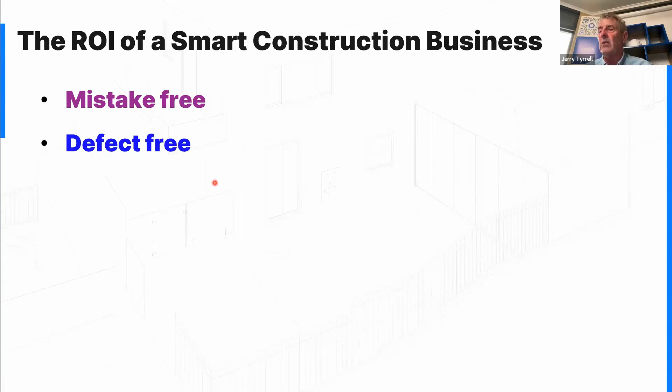I can't comment too much on global construction, but certainly in Australia there is a little bit of a drive for speed. We're under the pump in terms of the amount of construction projects we need to get out the door, and so this idea of speed at the cost of quality and compliance is out there. Are you essentially saying that if we've got some of those basic ideas of quality culture, access to compliance, clear knowledge, we can achieve speed and quality?

Yeah, it's a false economy, this story of speed, because I'm shameless about my ability to get jobs done. It made no difference to me to dust that corner, to make sure I'd sanded a surface, that I'd checked a surface prior to final coat. You'll see that the painting tool came out today as one of the granular trade things, which is really quite special for me. All aspects of that little bit of time checking a surface prior to top coat just made so much difference to the sparkle of what we come up with.

I haven't had a good look at the Paint O'Meter, Jerry. Do you want to talk about this? Oh, look, you're kind to me. Look, most of you know that I'm an architect designer, and I've done lots of other things as well.

So I'm a licensed contractor, but I'm not arrogant about this. I'm a really good painter, I loved it. People told me stuff. I read the back of the cans and the back of the packages, and so I'd know most things. But if you go back to some of these things, these best practice...

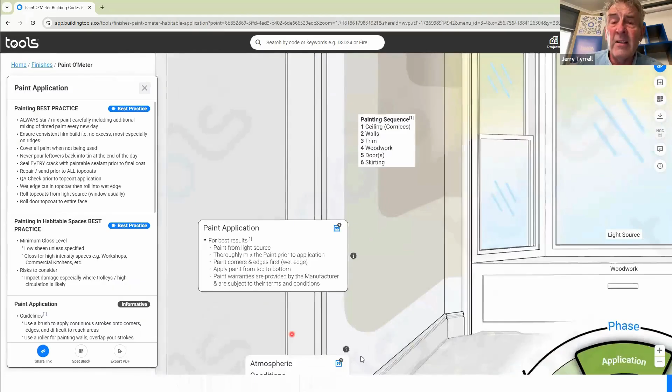So just stay on the side panel. Don't like side panels, but this is a good one. Always mix your paint. Sometimes people don't stir and mix paint, so the chemical composition, the science - and put up with me, this is smart, so commonsensical. I don't want to lecture you peeps out there, but there's nothing wrong with being really careful and thinking like a craftsman, knowing that the science of your paint has been very well developed by Dulux and some of the great chemical companies out there. But if you don't mix the chemicals together correctly, and if you don't mix the tint together, the paint is not going to perform as you want.

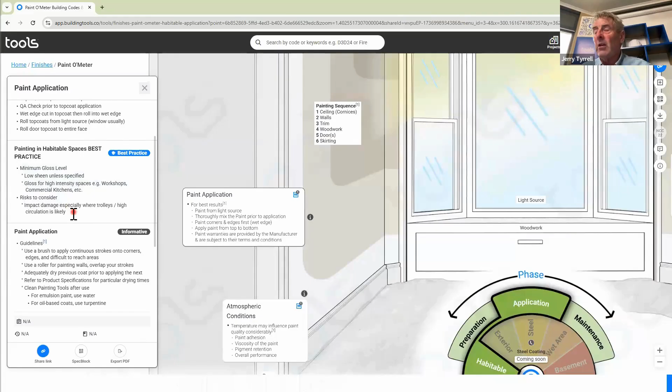Then there are other trade tips there on there. So obviously the prep - to me, you'll see we put on our Paint O'Meter. This is the first time I've ever seen this in any of the manuals. We've put in, if you go to the top of the screen there, see how we put the light source there? One of the major advantages for anybody putting finishes on is to be looking into the light as you apply it. So you're really careful - you're not only using best practice technique, which is either brush, roller, spray, but you're also looking very closely to make sure any defects in your application technique come in.

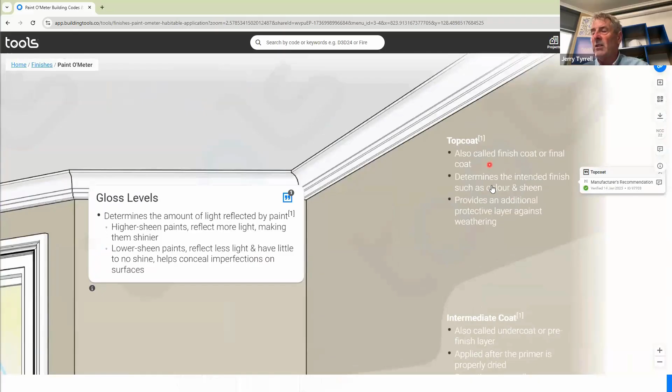You'll see we've got gloss levels, we've got all those things that even if you're an architect designer who's never used a paintbrush, never used a roller, you at least know exactly what all the craftsmen and tradesmen know about all the different gloss levels, the different textures. I know you're passionate about mold or the lack of it, so we've got to be aware of this. You've got to be aware of the dampness in your space, the dampness in your material. You've got to understand what moisture meters mean. These are smart - this is all this accumulated smartness that allows us to be mistake-free, defect-free.

And a lot of this, when we're talking about culture, quality culture, right - a lot of this is passed on through generations of painters, this knowledge, but just essentially having this readily available for people to browse through, read, and also disseminate, to share to others.

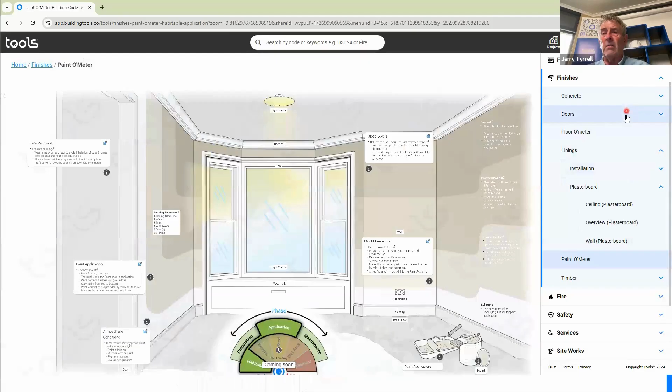I think that this is the craftsman - these are dozens of craftsmen. I had Danish craftsmen teach me how to apply gloss. This is when they were an oil-based gloss, and just how his brushwork was exquisite, and he cross-hatched. So most of you out there, hopefully you've done a bit of painting, but if you haven't, you've got all the technical aspects here that make you much more knowledgeable.

We will have exterior soon. We'll have other things being added to the Paint O'Meter that allows you to look at it and be up to speed, and be able to give good advice to both your client, and also to chat in the same language with any tradesman or craftsman doing the work.

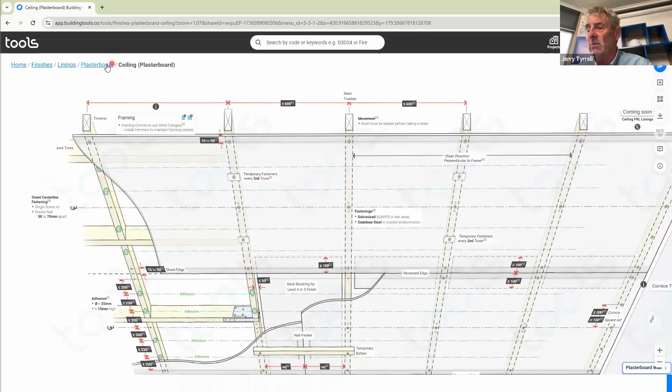Excellent. If I just take a moment here and go through some tools basics. The tools, the graphical representation of the building codes. You can find, zoom, share.

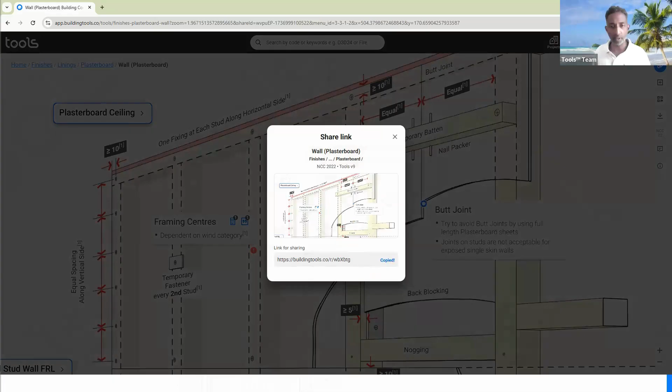One of the things we're really looking to do is be able to share this knowledge. So you can zoom into a detail, generate a share link. I always encourage people using this to zoom into the detail, and you can share that. Andrea, you're on the call here - I can share that with you, and then the recipient can get access to that knowledge.

Some of the other things we've added to this, Jerry, are code citations. Let me find one with code citations. The good part about this is that there was an emphasis in the early days of people saying, well, where's this coming from? And we'd say, well, obviously this is all taken from the NCC and all the reference documents, and we didn't have the citations in. So we've entered the citations.

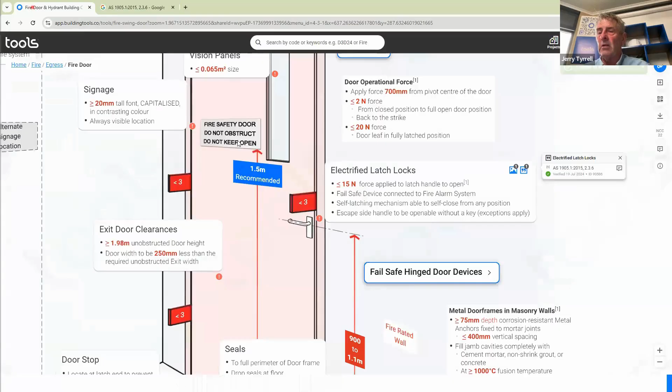I've had nobody say to me that they are going back to the citations unless they're into some sort of conflict or court matter, where they can very simply show the tribunal, show the arbitrator, show the court, show a barrister this drawing, and they can click the citation and go back to the relevant clause in the NCC and/or the reference document.

Absolutely. So do check it out. If you haven't checked it out, you can go into this menu. You can even go to view all tools, and there's 296. We haven't quite hit 300 there, but there is a plethora of information.

So coming back to this - mistake-free, defect-free, conflict-free. There are so many issues on site, Jerry, just because of differing views of perhaps the same detail. Yeah, people's misinterpretation or different interpretation of the codes.

So I'll quickly flick up a detail that's on tools, and I can clarify a fire door gap or something that they're arguing about, or a gradient or a ramp slope.

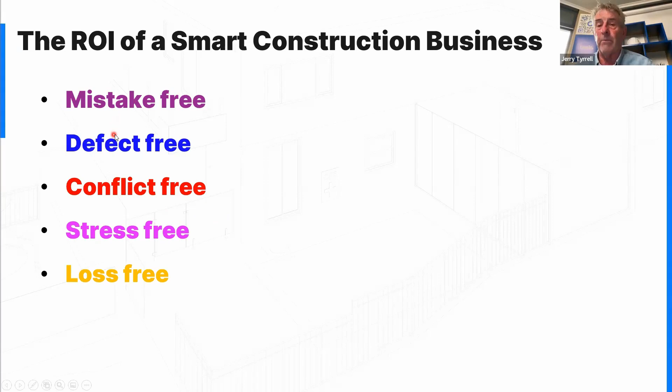So really, we look at these, and these are lovely ideas: to be mistake-free, to be defect-free, to have low or no conflict, reduce stress - we all love that - ultimately reduce loss, not only in our own practice. From all of those four above, you've got - yep.

And remember, stress creates an emotional, societal loss. So that's why I'm not into making a mistake and then having the stress of it, going home and not making profit, coming to work and having some bully stress you because they're just bad people. These are all losses that we're carrying, financial or societal or emotional.

Well, let's talk about that. So it's nice to talk about this. Let's say I'm in a particular situation where I want to use knowledge from tools to actually create that. What should we go to?

Let's go to ramps and walkways, for example. That's a different one - that's external. So it's got the maintenance walkways as well. Yep, so let's talk - let's say we're dealing with a particular detail.

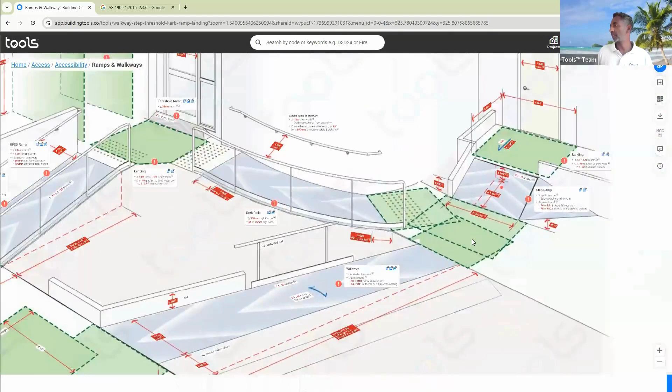All right, so I can zoom in. What are some ways that this is going to reduce conflict, stress, defects, mistakes - versus a concreter that's not going to put that at the landing, won't put a crossfall in it, so it's essentially a flat landing.

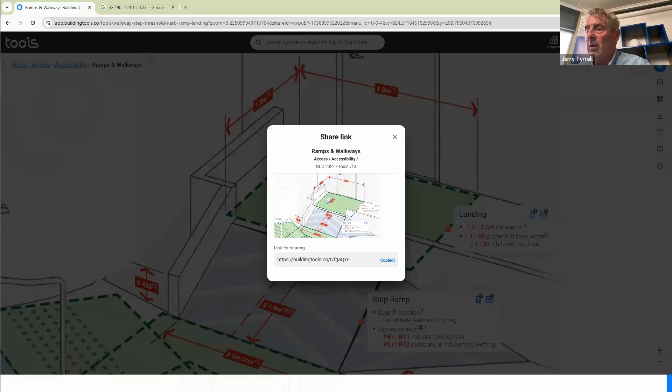And I've dealt with concreters now for 5 decades. I find they are particularly respectful. When I was younger, I was bright-eyed and bushy-tailed, and they'd put up with me - I'd say, let's make sure there's no ponding. Now I just hold up tools and say, look, we've got a slope in everything. You'll see that one of the things we launched today is our drainage science, so everything's got a slope in it.

The 1428 standard, which is where most of these ramp geometries come from, although it is mandated in the NCC, it does call up the access standard.

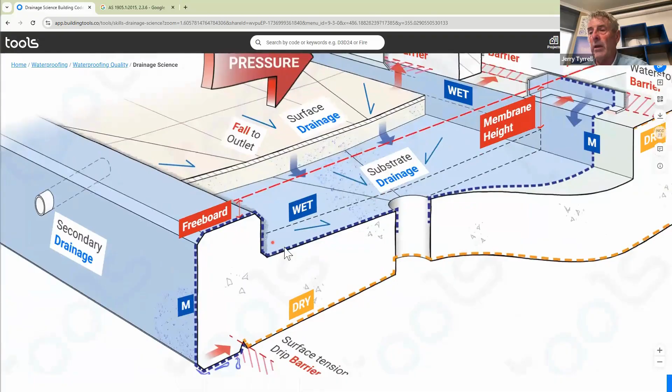We illustrated all the concepts of Newton's science. Isaac Newton, in 1687, decided he would articulate Newton's law, which is basic gravity. So we put all the ingredients of drainage science into one drawing called our drainage science.

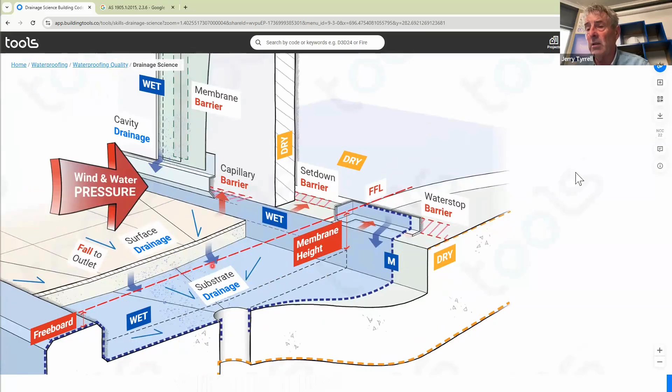It's a wonderful way for people to remind themselves, if they're having a quiet time, or if they've got subordinates who aren't careful about getting slopes and overlaps right, to create completely dry buildings. Believe it or not, dryness isn't just about the embarrassment of water getting in. Any moisture that gets into your building uncontrolled can lead to mold creation, which, if you've got a son or daughter with asthma or someone who gets allergies, is just disgusting.

This idea of integration of trades, understanding how the trade or craft of one person affects people down the line, and this includes design, right? It starts at the design stage. I had this despair moment about three weeks ago, thinking people aren't curious, and this teacher said to me, everybody's implicitly curious.

There's nothing wrong with believing that, yes, you have to blend a few things together. Don't make mistakes. Understand that when you're going to build, avoid defects and conflict on site by making sure you don't make mistakes, and get on with people who might know more than you do, and also teach and share with those who don't know as much as they should.

I think that's one of the keys here, is that in order to achieve all this, firstly, let's get clear about what craft and quality means. So quality meaning including the building code standards, but also the extras that make something high quality.

Being very clear about that, but then also being able to share, specify, and mandate that to the people you rely on. So if you're a designer, in the design cohort, Andre, I don't know exactly what you do. Maybe drop us a message and tell us what aspect of construction you're in.

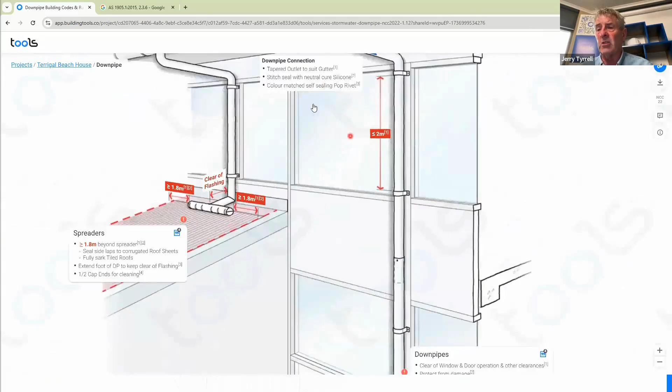But it's really nice to think that the certifiers will have less to do because they're passing on this knowledge, they're helping teach. So when they flag a defect or say it's not to code, they're able to quickly share a proper spreader design or just give tips.

And often the certifiers themselves don't even know what the correct plumbing process is. There are more and more carpenters coming into the certified building surveyors industry, but a lot of certifiers are academically trained and may not have had the trade skills. So it's nice to have an illustration of exactly how a tradesperson would do it.

Andre, thanks for mentioning working client side as a project manager. I think as a project manager, that's one of the ultimate octopus kind of roles, because you've got multiple stakeholders, multiple egos, multiple personalities to deal with, and multiple interpretations of what quality is.

A designer might think it's one thing, the engineer might think it's something else, and then the builder and the tradesman have a different interpretation again, and you're in the middle trying to coordinate that. Not an easy role, Jerry.

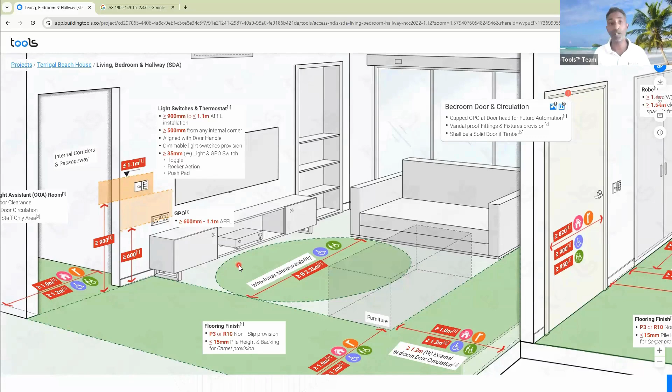And it's all affecting productivity because those four cohorts are all looking at things their own way. Whereas I think the basis of most trades, the source of truth, remains the same. Materials change, geometry changes, colours change, finishes change, but the basic geometry that you have to manage, Andre, stays the same.

Absolutely. So, Andre, one of the things you can do as a PM is create folders within the project section.

You can bundle different tools together, then download those as PDF, or you can share those. You can share a link to that, and then the people that you rely upon to get it right, to deliver ultimately the product that you need, and also deliver it in a mistake, defect, conflict, low stress way. You can. It's okay to get it right.

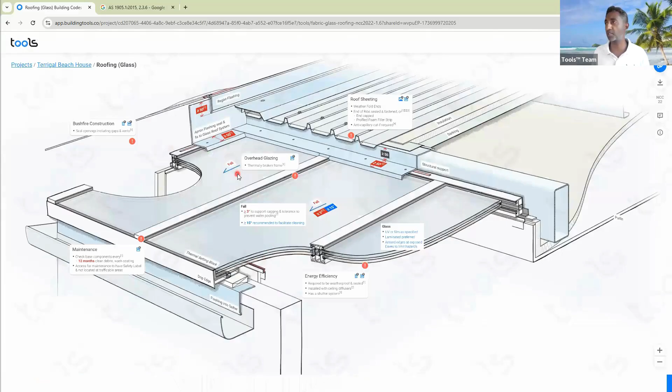100%. And you mentioned before, a teacher mentioned that people are inherently curious if they're engaged, if knowledge is interesting and engaging. I think in today's world where attention spans are shorter than ever, being able to rapidly communicate construction compliance in a fun, engaging way, graphically, is definitely one way you can really create that teamwork.

So one of the points I put in here was communicate to team and customers. This is getting back to the culture, Jerry, is that you communicate internally and say, look, we're making a stand for quality. We're making a product like tools and other materials available to all of you, and watch their curiosity. One of the great things about tools is you can get data on what tools are most popular. It's amazing looking at the journey that people take when they start exploring tools, and the inherent curiosity being able to...

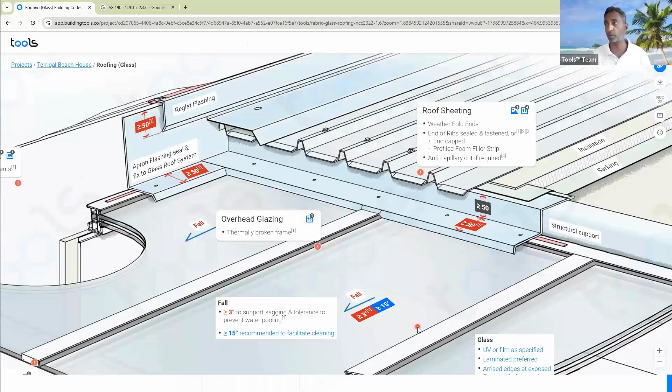Look at BlueScope's response, Siva. Remember them looking at the valley detail with us? Yep, and just their curiosity for that. Yeah, 100%. BlueScope Steel are very, very interested in communicating their quality standards graphically.

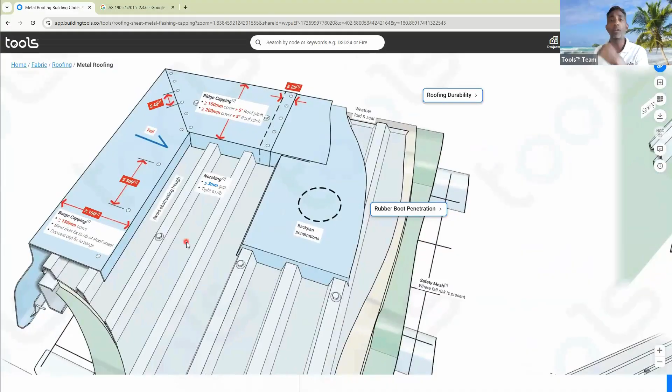It's all about knowledge and the communication of knowledge, right? So if it's easy and it's no longer in the too hard basket, we can get some of that. And also in terms of customers, as a customer, I want to rely upon you, Mr. and Mrs. Professional, to get it right. I don't want headaches, right?

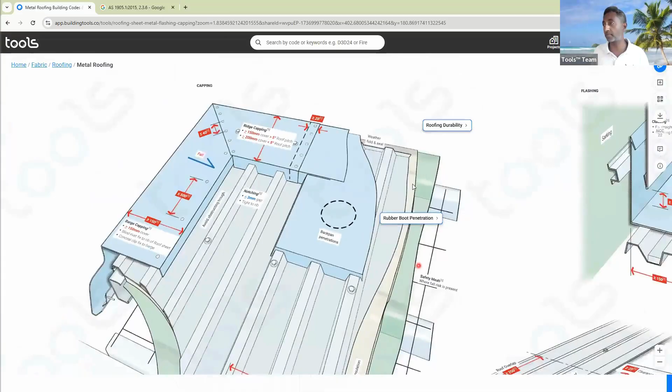And so if you're pitching for my work and I'm getting 3 quotes, if I see an organization that's using a quality system like tools, you're going to win more business. You're going to impress me. You're going to stand out. So these graphics, even if you're a layperson, everybody knows what they're looking at, you can look at that and go, okay, well, that looks like a roof, a metal roof to me.

Even the QMSs that I'm seeing, I remember I've watched 5 decades of people promising, yes, they're going to do this, they're going to do that. Nobody showed me how they were going to do it. So there was good intentions. I can say the industry was noble, but there was all hat, no cattle.

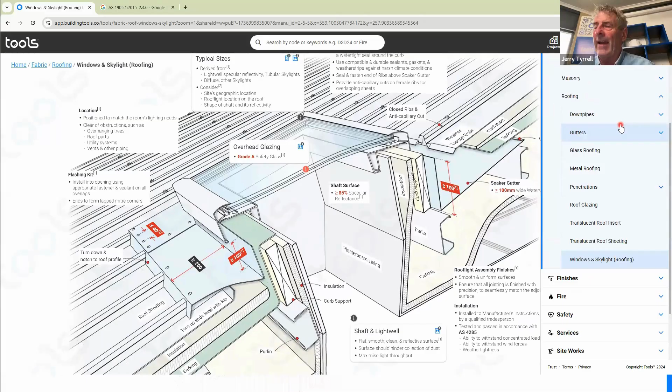Yeah. So they're saying, here, we've got the QMS, we're doing this, we're doing that, blah, blah, blah, blah. Well, tools provides the how to the QMS. And it's a relentless, reliable, provable, findable resource that everybody can turn to before they've made the mistake and made a dumb choice.

Just a couple of little things, Andre. If you weren't aware, you can generate a spec block, a specification block, which creates a QR code, and that's locked in time. So I've specified this for NCC 22. That can then be put onto a document, it can be put onto a drawing, and even if it's accessed 2-3 years from now, it'll go back to this version.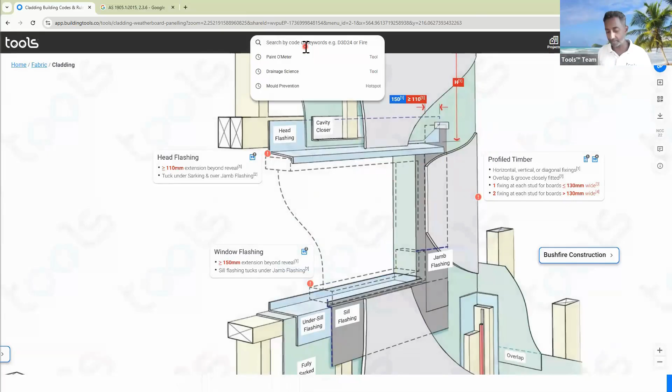One of the things the team is busily working on at the moment is prepping for the NCC 2025 changes, as of May 1st, 25. So what you'll get is the NCC switcher, and soon we'll have NCC 2025. You'll simply be able to change the switcher, and all of the codes will magically update to the latest codes. And I say often, it's nothing magic, there's a lot of work that goes behind enabling that. But our mantra is let's make education and knowledge easy to access.

All right, Jerry? Sure. So, okay, so that's the ROI. It comes down to communication. Andre, this is so good. With all focus on technology, I wonder why people in the industry are not focusing more on a solution such as tools.

Thank you, very kind. So much more value than anything.

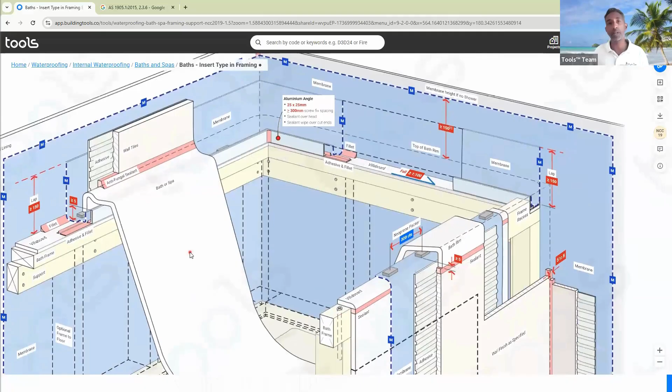Andre, this is, yes, a fantastic innovation, but in its essence what it's doing is solving communication. That's all it is. More than 80% of the problems in this world could be resolved with good communication. And what this does is graphically communicate the requirements, nice and easy. Doesn't matter if you speak a different language, if English is your second language, whether you're a visual person or a text person, you can sit alongside somebody and explain that a lot easier.

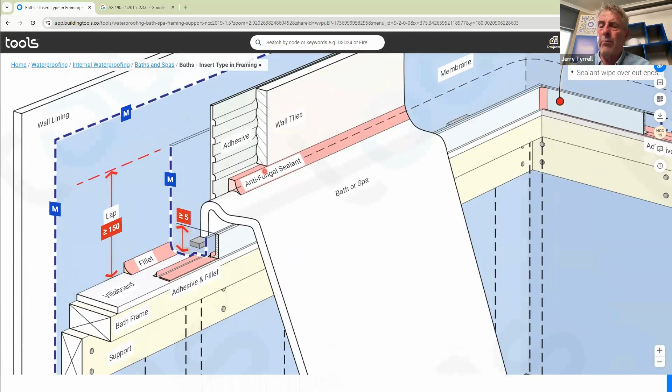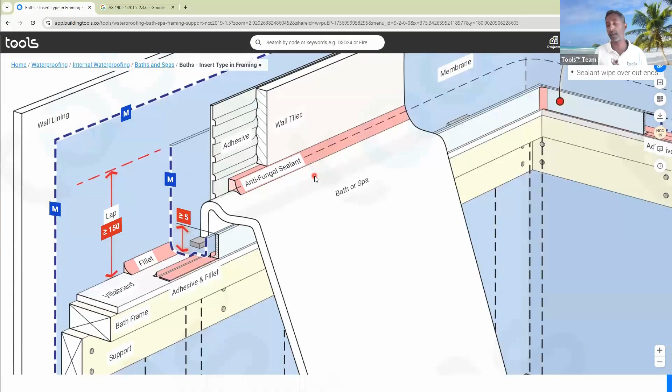We had Saudi Arabia approach us, and I said imagine if Gaza and Syria and Sudan were being rebuilt using Arabic tools. It's that easy to make those changes. Well, fortunately there's a ceasefire going on there, but there's a lot of work to do to rebuild those. So imagine being able to widely distribute a product like this, which clearly communicates building standards. We've got 2 million Palestinians who are feeling helpless and frustrated, and all they need are the right tools to get going. So don't get me started - that would be a very smart decision societally and globally for us to get behind everybody having access to tools in their language. So we're talking about smart.

So we'll finish off with this. One of the things we're going to be doing in the next sessions is deep diving into the tools. So Jerry, next tool shed we're going to talk about cladding basics, we're going to deep dive into ramps and walkways. This is the calendar for the rest of this quarter.

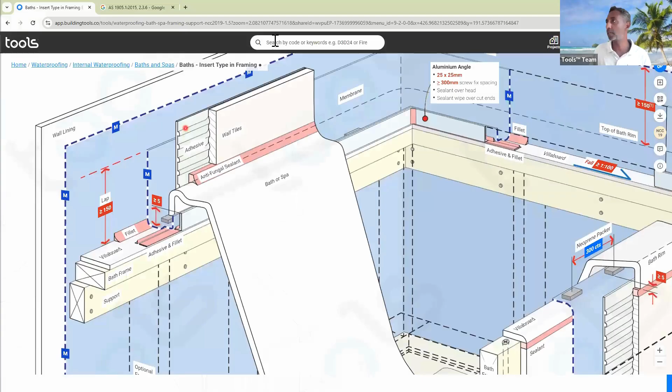Swing door clearances - our analytics show that swing door clearance is one of the most popular tools, which is amazing because I hadn't expected it, but this is one of our most popular tools. You come in and set your door type, so you say I've got a hinge side door and it's a meter wide, you can set using the whole meters and it'll give you the clearances. All of that dynamically changes, and it doesn't matter which path you're traveling, that'll update. So popular tool, we'll go into that a bit more and we're going to really cover, Jerry, the science of what's the why behind this.

Some of it might be obvious, there'll be a bit of that, but sometimes it'll just be raising awareness - sorry, I just had a feed from an investment client wanting me to look at a large hotel somewhere. So it will be looking at the science, but looking at some of these tools this first quarter allows you to see possibly why we've done this.

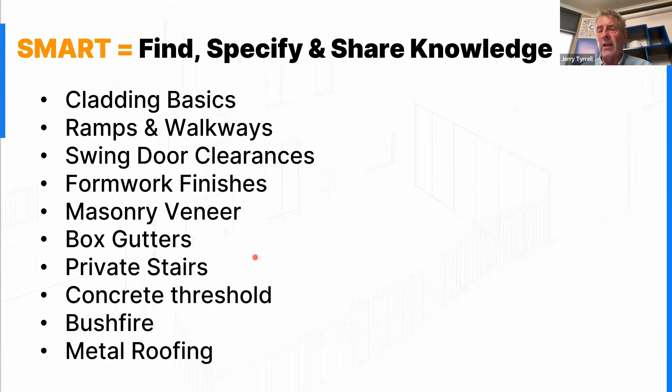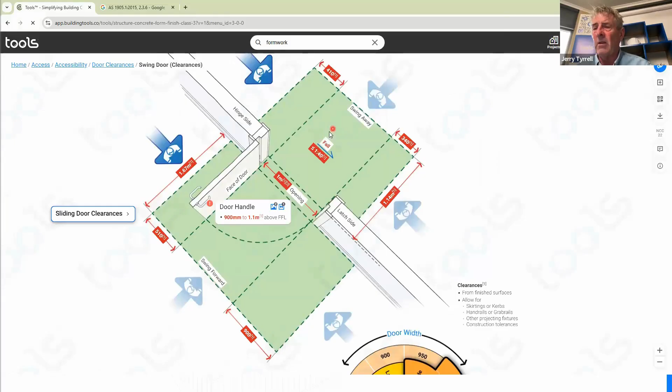So, formwork finishes - I'm not often looking at class 1 formwork, but I've often left it to the engineer, left it to the concreter. I want to be able to go there before they make a mistake on the entry of a $15 million building, or it might be just one beautiful class 1 finish in a residential home, a letterbox with a recess. I want to make sure we pointed out to them that you'll be measured by this level of quality.

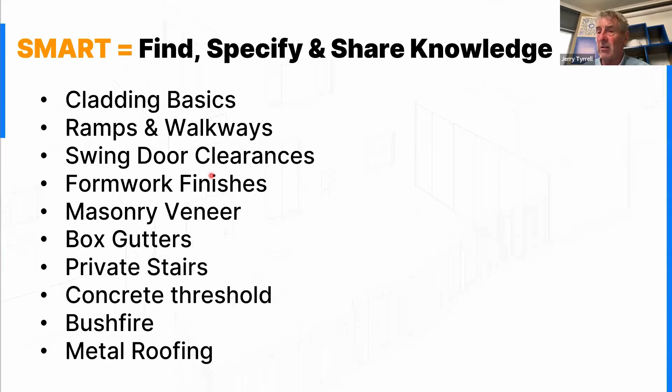And on that, again with making this knowledge shareable, you can set the class, and all of this information updates, and then you can either share it, download the PDF, add it to a project, or create a spec block. It's really smart, and you may not do any of those things other than just send it off. A lot of our customers have got their own version of tools, so it's AAC tools - when they share it, it's a brand thing. So they share class 1 and say, 'Hey George, we know you're a great concreter, but these are the quality standards required for class 1 concrete, and we'll be using this if there's any dispute, because we are smart and we don't want conflict.'